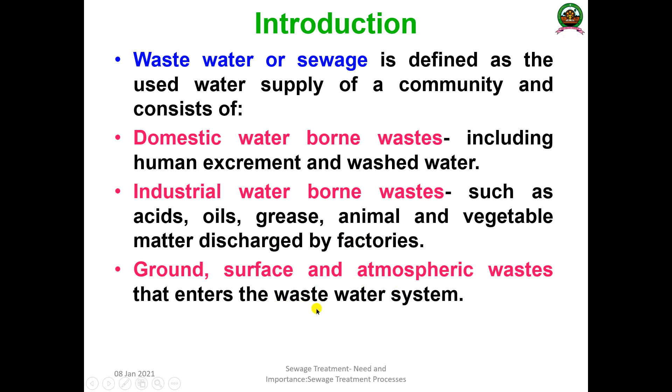Domestic waterborne waste includes human excrement and wash water. Industrial waterborne waste includes acids, oils, grease, animal and vegetable matters discharged by factories. Then ground, surface and atmospheric water also enters into the wastewater system.

There are different types of water systems, known as sewers. There are three types: sanitary sewers, which carry domestic and industrial sewage; storm sewers, which carry surface and rainwater; and combined sewers, which carry wastewater from both sanitary and storm sewers. These are the various types of wastewater systems.

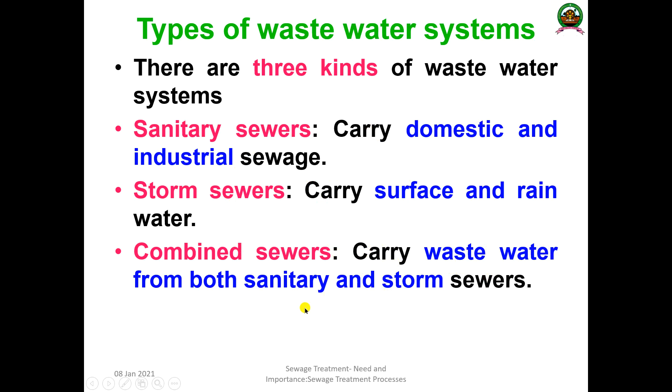We have discussed the quality of the wastewater system using dissolved oxygen. Dissolved oxygen, or DO, is the amount of gaseous oxygen dissolved in the water - a measure of how much oxygen is dissolved, and the amount available to living organisms in the aquatic ecosystem. The amount of dissolved oxygen in a stream or lake can tell us a lot about its water quality.

If the water is polluted, the dissolved oxygen content will be very low. Oxygen enters the water by direct absorption from the atmosphere, by rapid movement, or as a waste product of plant photosynthesis. Water temperature and volume of moving and circulating water can affect the dissolved oxygen content. If dissolved oxygen content is too high it is problematic, and similarly if it is too low it is also problematic for the aquatic ecosystem. So dissolved oxygen should be in a balanced state.

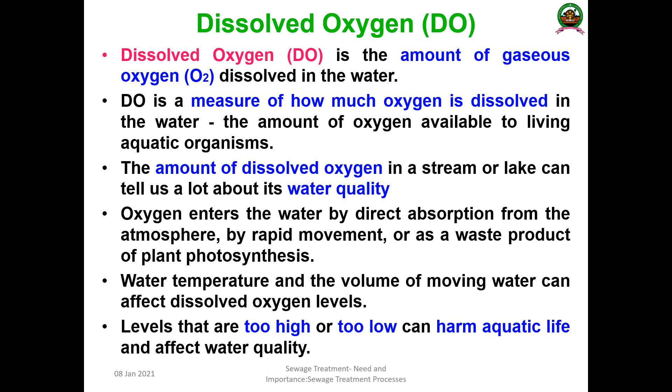In the previous class we discussed the conventional method to estimate dissolved oxygen: the Winkler method. Another important thing is biological oxygen demand, or biochemical oxygen demand. This is the estimation of dissolved oxygen on the first day and the dissolved oxygen on the last or fifth day. The difference between D1 minus D5 is known as the biochemical oxygen demand.

You need to estimate the dissolved oxygen twice by the Winkler method. This is the amount of dissolved oxygen required by microorganisms for the aerobic degradation of organic matter present in the wastewater, which we have already discussed.

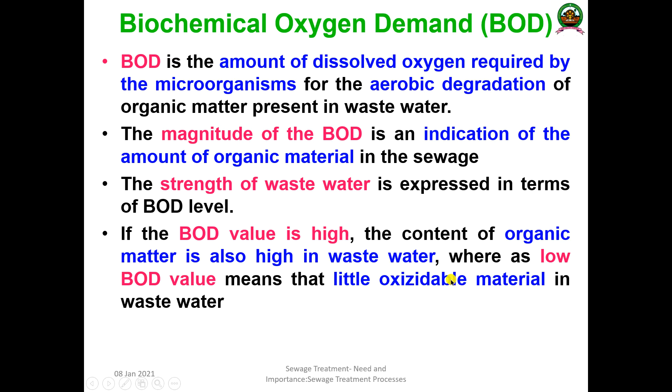The magnitude of the BOD is an indication of the amount of organic material in the sewage. In the last class we saw that if the BOD level is very high, the pollution is also very high. The strength of wastewater is expressed in terms of biological oxygen demand. If the BOD value is high, the organic matter content is also very high in the water, but if the BOD level is low, it means very little oxidizable material is present in the wastewater. So biochemical oxygen demand has a lot of significance in wastewater microbiology.

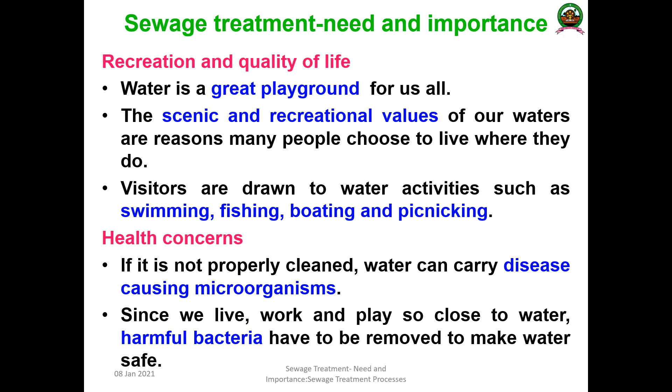The next one is sewage treatment, the need and necessity of restoring the water supply. All communities, especially areas where water is not there, that face a lot of difficulty due to water scarcity, need to ensure they have good quality water treatment facilities in place so that the treated water can be reused or returned to the water cycle but never wasted. That is why rainwater harvesting is very, very important. Water should not be polluted; if the water is polluted, it should be treated adequately. That is the next important reason.

Next one is protecting the planet. Wastewater can include contaminants from both residential and commercial environments. If untreated, the chemical components and pathogens in wastewater can harm the health of animals, plants and birds that live very near the water. It can also contaminate crops and drinking water facilities, adversely affecting human health. Wastewater treatment is fundamental to protecting the health of many different ecosystems and the whole environment. Because of all these reasons, the wastewater treatment procedure is very, very important. That is the ultimate reason why we treat wastewater.

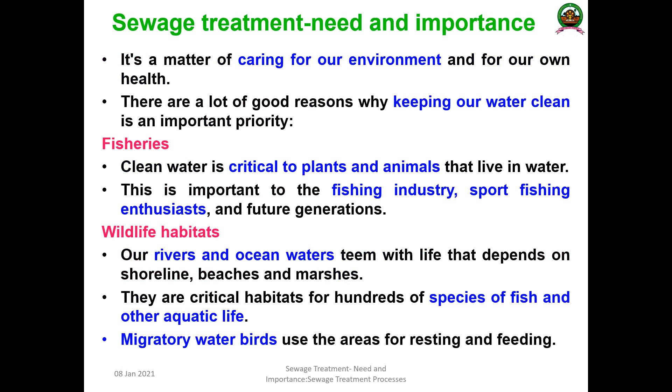Now we are going to discuss the details of wastewater treatment: what are the aims and objectives of this process? The major objective and challenge of wastewater treatment is to remove components with high biochemical oxygen demand. You know that when biochemical oxygen demand is very high, the pollution will be very, very high. To remove compounds with high biochemical oxygen demand is the first and foremost objective.

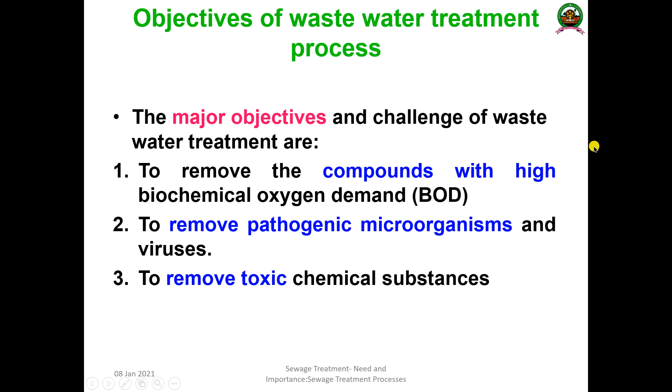Next, as usual, to remove pathogenic microorganisms and viruses. The next one is to remove toxic chemical compounds. We have discussed the major heavy metals and chemicals present that adversely cause a lot of side effects and health issues. These are the very important reasons why you want to treat water, and these are the major objectives. So what are the major steps of the wastewater treatment process?

The very important steps of the wastewater treatment process are: primary treatment, known as mechanical screening; secondary treatment, known as biological purification; and the third one, tertiary treatment or advanced method, known as chemical purification.

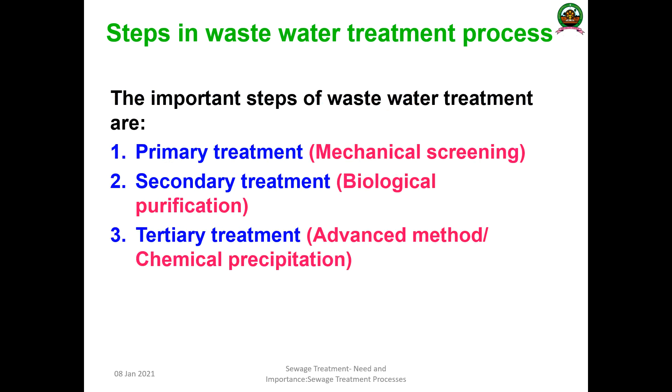Okay, so these are the steps involved in the water purification process. Here you can see this step is the primary treatment, this is the secondary treatment, and this is the tertiary treatment. This is known as the physical process - the mechanical process is known as physical process, and the second one is known as the microbial process, shown in red color, and the last one is the tertiary treatment, or advanced method, or chemical precipitation.

These primary effluents undergo aeration. The microorganisms oxidize the waste present in the water. The microorganisms take the waste material and utilize it, and this is done either in a trickling filter, or using an activated sludge system - we will discuss - or in a settling tank.

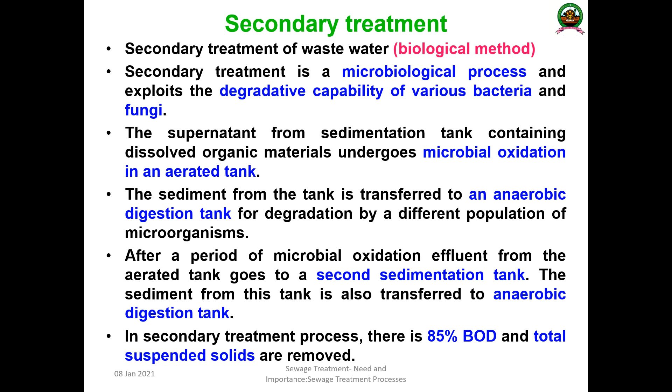Now we are going to discuss them one by one. These are very, very important. These are the conventional secondary treatment processes that use a microbial biofilm. Now, what do you mean by trickling filter? The first one is the trickling filter.

A trickling filter is a tank 3 to 10 feet deep, packed with either crushed rock or some other supporting material, and these rock particles or supporting material are coated with a microbial film. So this big tank, 3 to 10 feet deep, is filled with crushed rock or some other supporting material, and the surface of this material is coated with a microbial film.

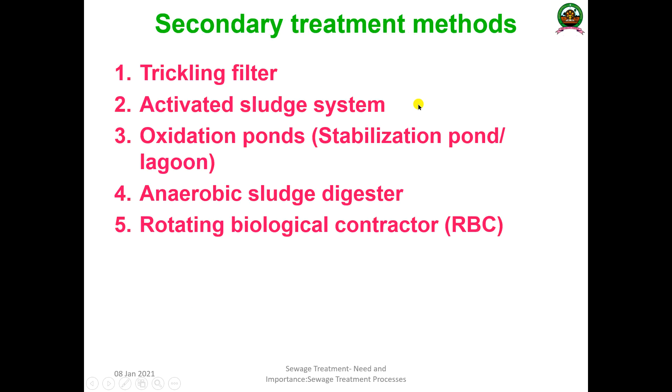First, the sludge that is coming from the primary treatment will be activated. What do you mean by this activation? In this activated sludge system, the sewage that is received from the primary treatment plant is mixed with an inoculum of microorganisms and aerated with oxygen for 15 hours. This step is known as activation of the sludge.

What do you mean by activation of sludge? The water coming from this tank will be placed in a very big tank, where it mixes with certain microorganisms and is aerated with pure oxygen for 15 hours. Once the oxygen concentration increases, the aerobic microorganisms are activated and start degrading the waste material. That is known as activation of the sludge, thus it is known as the activated sludge system.

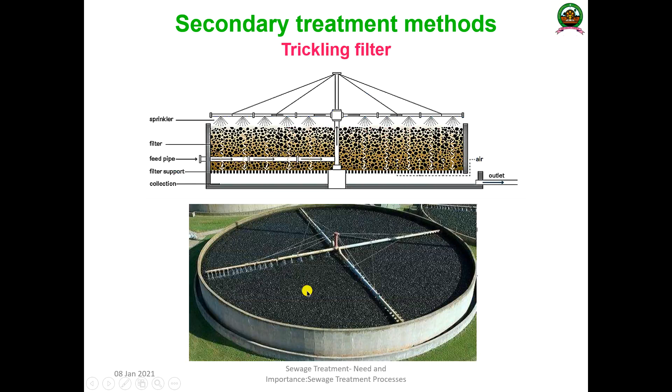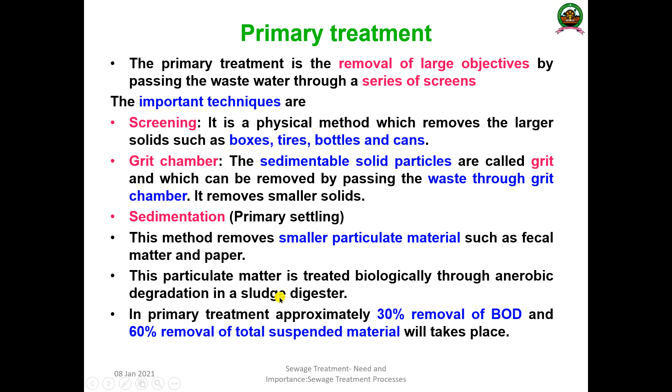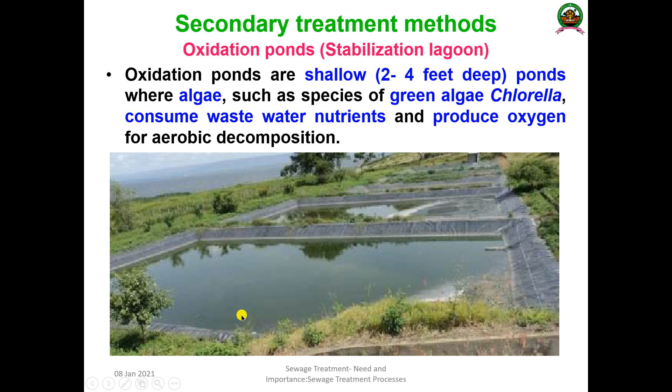Here you can see a lot of algae, unicellular algae such as Chlorella, Scenedesmus or Chlamydomonas, that will be made available and will degrade. Now, what is this oxidation pond? This is otherwise known as a stabilization pond or stabilization lagoon, or simply as secondary treatment lagoons.

These are a highly inexpensive method to build and operate, and require large areas of land. This is a very inexpensive method. Nothing else is required: you need some space and water, and you will be able to cultivate the algae that will be used for this process. It has two main important steps.

Number one, the sewage pond is deep enough that conditions are almost anaerobic. This is the primary treatment here. The sewage pond is deep enough that at the bottom level it will be anaerobic, so the sludge settles out at this stage. The first stage: the sewage pond is deep enough that conditions are almost entirely anaerobic, so the sludge settles out at this stage.

Then the second stage corresponds to secondary treatment. The effluent is pumped into an adjoining pond system, with ponds shallow enough to be aerated by wave action. Due to the wave action, this will be aerated. If there is no wave action or wind, then you can aerate by a manual method also.

Because it is difficult to maintain aerobic conditions for bacterial growth in a very big pond where so much organic matter is present, and sometimes due to the toxicity of the waste material the bacteria will not grow, you can cultivate the algae. Algal growth is encouraged to produce oxygen. The bacterial action in decomposing the organic matter in the waste generates carbon dioxide in the lagoon.

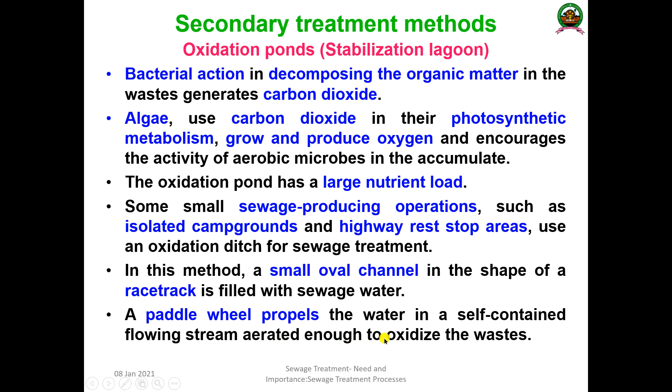Then the primary sludge accumulates in the primary sedimentation tank, and sludge accumulates in the activated sludge and trickling filter secondary treatment. For further treatment, these sludges are pumped into an anaerobic sludge digester. Till now we have been discussing the oxidation pond. Next one is the anaerobic sludge digester.

In the anaerobic sludge digester, the primary sludge from the primary sedimentation tank and the sludge from the activated sludge, trickling filter and secondary settling tank are treated further. What cannot be removed by the aerobic bacteria will be removed by this anaerobic sludge digester. The process of sludge digestion is carried out in a large tank from which oxygen is completely excluded, known as an anaerobic tank. In the secondary treatment, aerobic conditions are maintained so that the organic matter is converted to carbon dioxide, water and solids that can settle out.

In the secondary treatment, as I said, aerobic condition is maintained so that the organic matter is converted to carbon dioxide, water and solids which can settle out. And anaerobic sludge digestion is designed to encourage the growth of anaerobic bacteria, because the waste material that is not possible to degrade by aerobic process will be pumped into the anaerobic

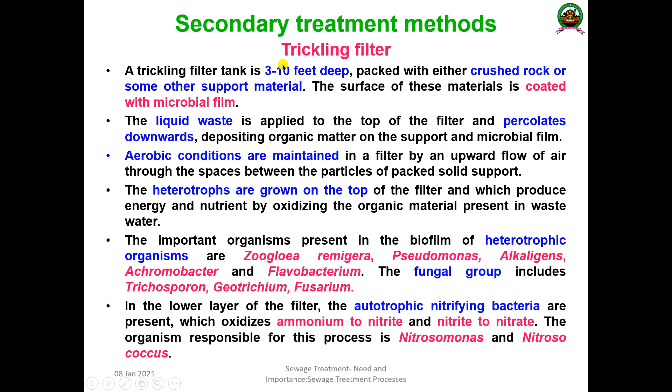Then, to reduce the volume of this undigested sludge, it is pumped to a shallow drying bed or water extracting filter. As I said, the undigested sludge effluent will be pumped into a sludge bed where it will be dried, and this can be used as an excellent fertilizer for agriculture. So that is another important application.

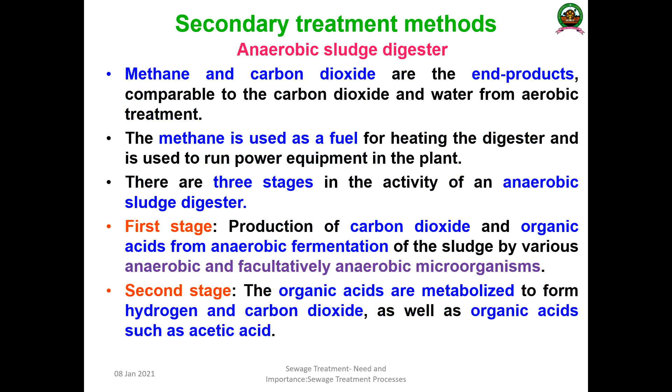And that is known as biosolid. So the sludge can be used for landfill or as a soil conditioner that has a lot of nutrients.

That is known as biosolid. There are two types of biosolid: class 1 biosolids or class A sludge, and class 2 or class B sludge. Class A means there are no detectable pathogens present, only residues. Class B sludge is generally treated only to reduce the number of pathogens below a certain level, but it cannot be completely free from pathogens. There are still a little bit of pathogens present, and that is a very important point.

So most sludge is obtained from this class B process, and public access to the application site is limited, because this sludge can carry some microorganisms coming out of this particular waste, and that is why this is important.

The sludge has about 1/5 of the growth enhancing value of normal commercial lawn fertilizer, but it has desirable soil conditioning qualities. This sludge can be used as an effective fertilizer for the lawn.

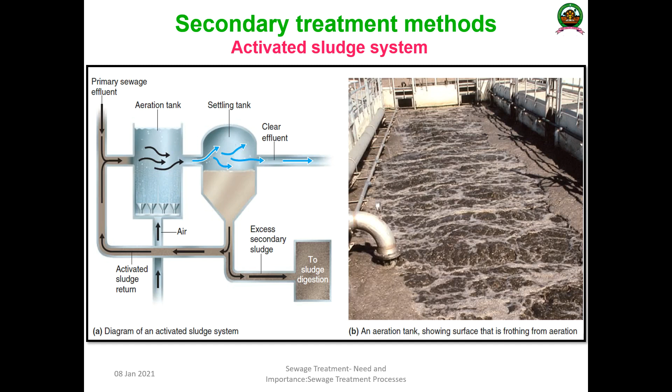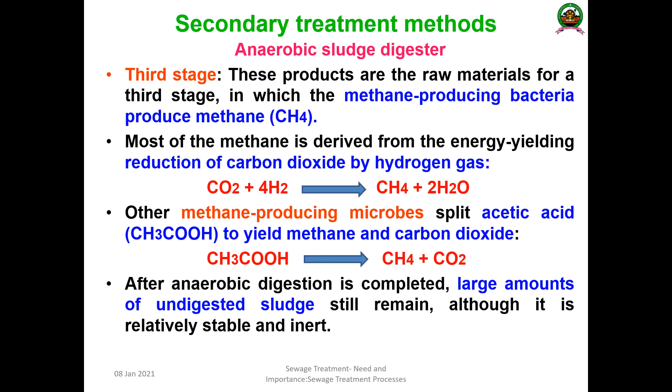But there is a potential problem. Once this waste material is collected from the anaerobic sludge digester, it carries a lot of heavy metals. That is a potential problem, and toxicity will be there. Contamination with toxic material is the major problem here.

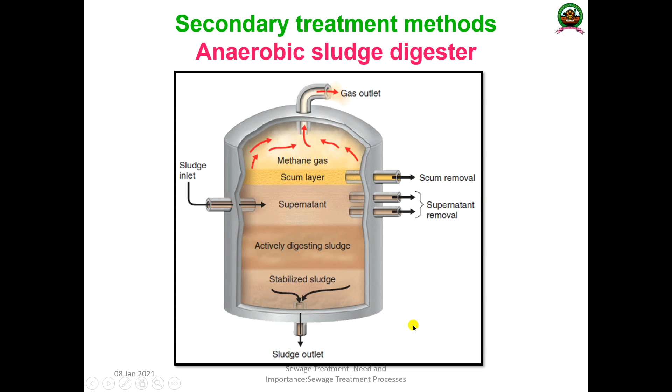So this is all about secondary treatment. The next important secondary treatment method is known as the rotating biological contactor, or RBC. This is a disc-like material where a microbial film is coated. It is a biological fixed film treatment process used in wastewater treatment following primary treatment. Instead of other methods, you can use this particular method also. The RBC process allows wastewater to come in contact with the biological film in order to remove pollutants in the wastewater before the treated wastewater is discharged into the environment.

So what does this RBC consist of? The water is poured onto the rotating disc, which consists of a microbial film. When the disc is continuously rotating, it carries a lot of microorganisms. When water is poured over it, the organic components are utilized by the microorganisms and removed from the water.

It consists of a series of closely spaced parallel discs mounted on a rotating shaft which is supported just above the surface of the water. The microorganisms grow on the surface of the disc, where biological degradation of the wastewater and pollutants takes place.

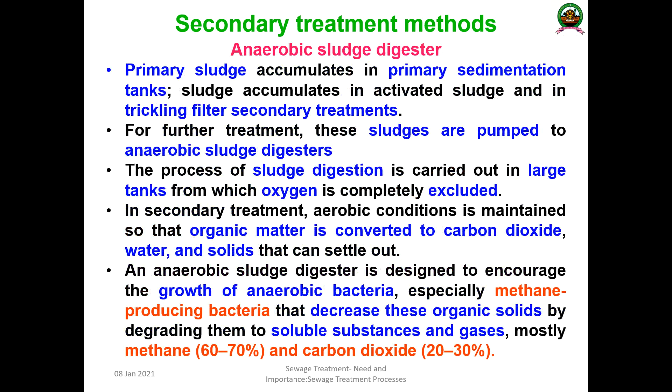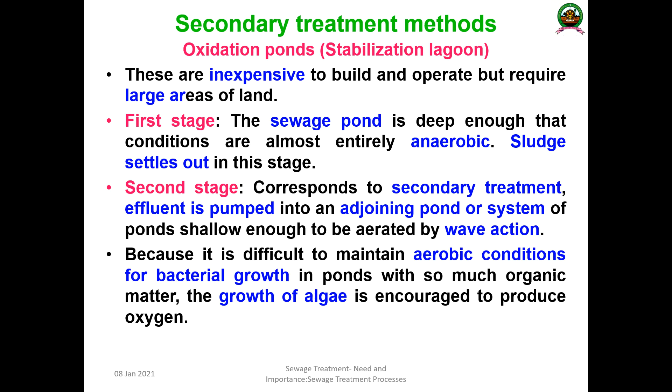The collected water will be treated and gathered through a system designed for this purpose. That's another important method, and that's all about secondary treatment. We have discussed 5 important methods: trickling filter, activated sludge system, oxidation pond or stabilization lagoons, anaerobic sludge digester, and rotating biological contactor. This is all about the secondary treatment process.

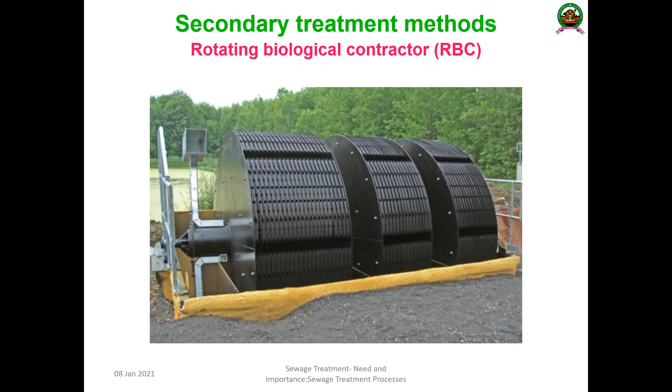After secondary treatment, the last step is tertiary treatment, an advanced or chemical method. Secondary treatment is known as biological method because microorganisms are mainly useful for degradation. This last step of wastewater treatment removes the additional pollutants remaining after secondary treatment, consisting of water purification and chemical flocculation, which removes much of the remaining organic matter that is not possible to remove by other processes.

Then final filtration removes solids which are dried and are incinerated or used as landfill or fertilizer.

The next and most important step is chlorination. Chlorination adds liquid effluent to kill microorganisms, some of which may be pathogenic. The final effluent should be dechlorinated before being discharged into the body of water, because chlorine is detrimental to the microbial life.

You add chlorine so it removes all the bacteria in the wastewater. But before you discharge that water into any body of water, the chlorine must be removed through a dechlorination process. Otherwise, if you pass this chlorinated water straight into the ecosystem, useful natural microbial flora will die, because chlorine is toxic even to them.

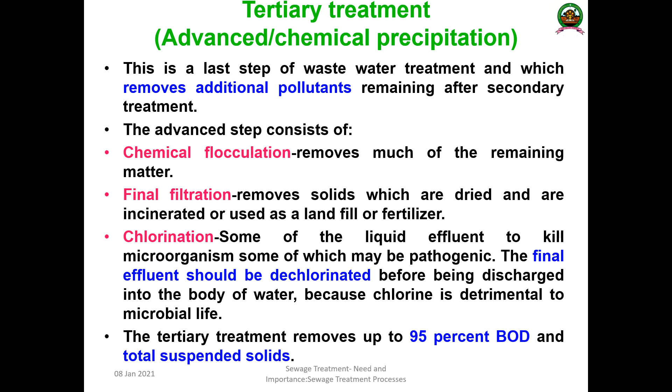So tertiary treatment removes up to 95% of the BOD and all the total suspended solids. We are not saying 100% of waste material can be removed, but 95 or 96% can be removed. This is the most important aspect of tertiary treatment.

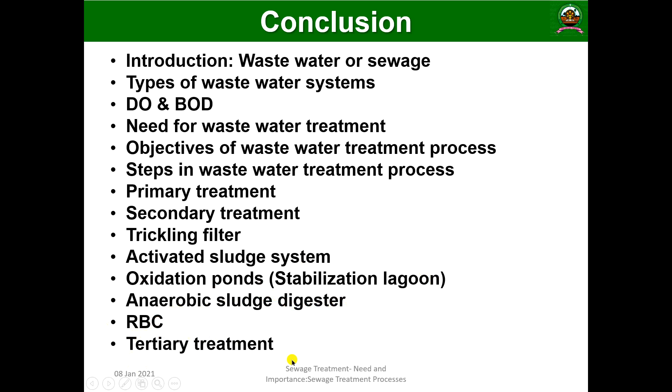There are 3 steps. Primary treatment is known as the physical or mechanical process. Secondary treatment is the biological process, such as the trickling filter. Tertiary treatment is the advanced method. Primary treatment removes 30% of the BOD, secondary treatment removes 85% of BOD, and tertiary treatment removes 95% of BOD. The main secondary treatment processes are the trickling filter, activated sludge system, oxidation ponds or stabilization lagoons, anaerobic sludge digester, and rotating biological contactor, while tertiary treatment includes chlorination, bromination, etc.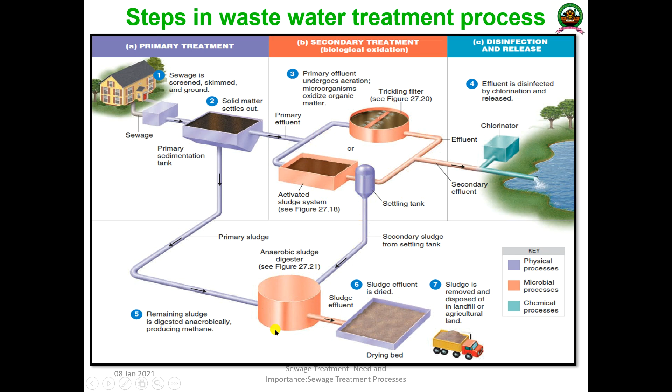When discussing the system, you should know what happens at the primary, secondary, and tertiary treatment stages. Finally, the water is treated at all levels and discharged into the lake after chlorination. The impurities coming out after this step are free of microorganisms. If any microorganisms are not removed, the water is transferred to the digester, the anaerobic digester. This is a very important aspect.